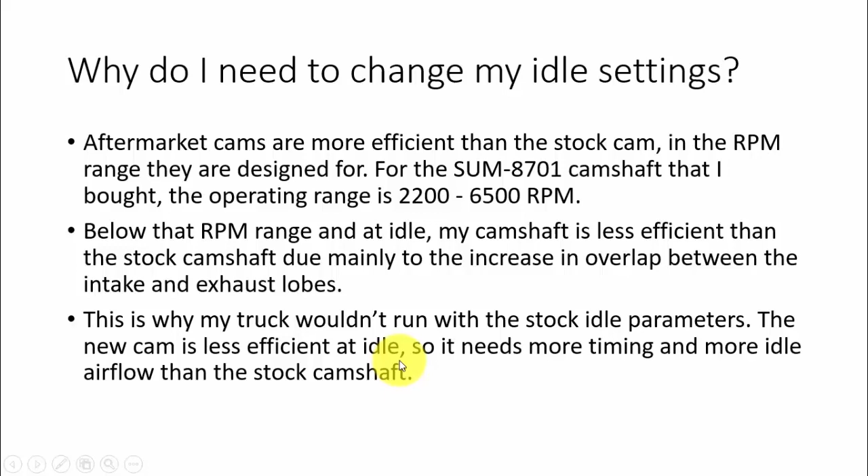So that's why my truck wouldn't run with those stock idle parameters. The new cam's less efficient at idle, so it needs more timing and more idle airflow than the stock camshaft. So the first thing I changed was increase that base idle RPM set point. This is basically the target the ECM wants the engine to idle at. Because of the increased overlap, they don't idle as stable as a stock cam, so you need to increase the idle speed.

And I define a stable idle as being able to stick within that target set point plus or minus 50 RPM. So the first thing I did in that last video was go into this table and add 225 RPM to every cell. I wanted the slowest idle speed the ECM would ever command to be 750, and that's normally when the truck is operating. The engine coolant temp is probably in this row here anyways. So I wanted the lowest speed the ECM would tell the truck to idle at to be 750.

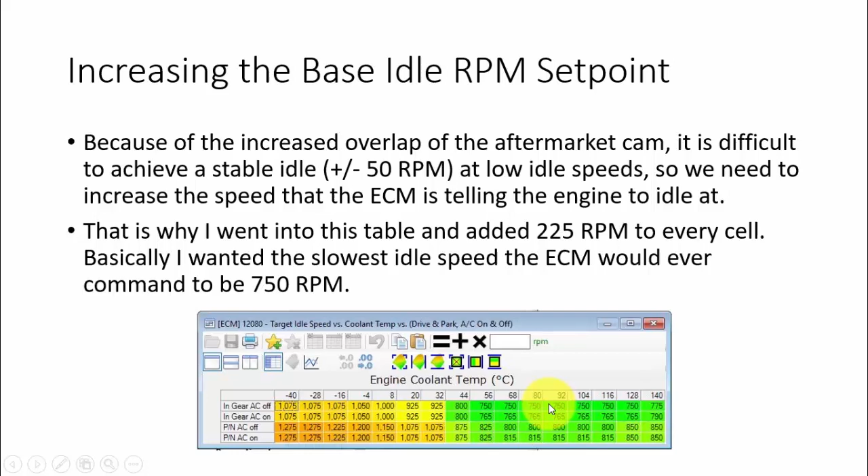So next slide, I'll tell you how I got that 750 number. It is basically from this table here, which I believe came from somewhere on the HP Tuners forum. So I looked at my cam card.

It has an overlap of -1 degrees. And so looking at this table here, it's less than 0. So that's why I went for a target idle RPM. It says 750 to 850, but I went on the lower end of that. Basically, the ideal idle speed for any cam, you want it to be the lowest RPM that it will be stable at, like stay within that plus or minus 50 RPM, like lower is better.

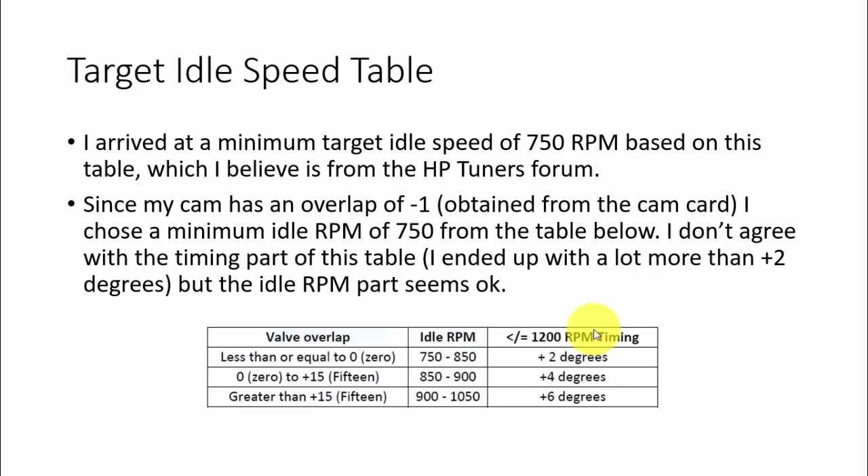I don't totally agree with this timing part of the table. I ended up with a lot more than an extra 2 degrees of timing, but as you'll see later in the presentation, I think I might have actually screwed up and went a little too high on my base idle spark advance tables, but we'll tweak that when we hop on and do some live tuning on the truck at the end of this presentation here.

So I also wanted to talk a little bit about how this ECM controls the idle, and it's different on newer Chevys. Newer Chevys with the electronic throttle actually use that electronic throttle as your idle air control motor. But since this is an older P01, or some people call it the 0411 computer, basically it's got 2 ways of maintaining that target speed that we entered into that last table. The fastest way of controlling that idle speed is by adjusting the ignition timing, and it does that based on the overspeed and underspeed tables, which we'll look at a little later in this presentation.

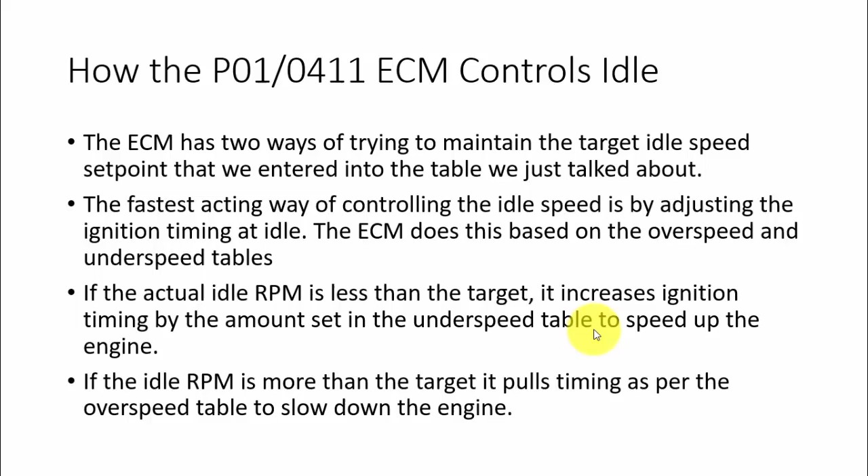So if your actual idle RPM is less than the target, like let's say from that table, the ECM wants the engine to idle at 750 RPM. If your actual idle is 700, it's going to increase that ignition timing to speed up the engine. And if your idle RPM is more than the target, like let's say it's 800, it'll pull timing out to slow down the engine. So ignition timing reacts fast, and it's a fast way of controlling the idle basically.

But there's another way that the ECM tweaks the idle speed, and that is with the idle air controller, and that's a slower reacting way of controlling the idle speed. It opens and closes the idle air controller, and like I said, on newer vehicles it just opens and closes the electronic throttle, and that's basically like stepping on the gas a little bit with your foot. It just lets a little more air into the throttle body.

And so to decide how far it opens that idle air controller motor, the ECM looks at this base running airflow table, and there's another table it uses in there that converts this grams per second or desired airflow into idle air controller steps, but I think you only need to change that if you're going with like an aftermarket throttle body. So since I've got the stock throttle body that came with my 5.3, I left that idle air controller steps table alone.

But that's why at the start of that last video I had to go in and adjust this table. I adjusted most of the cells to 14, and that's basically like telling that idle air controller stepper to open the gas a little more. It's like putting your foot on the gas pedal a bit to keep the truck idling better.

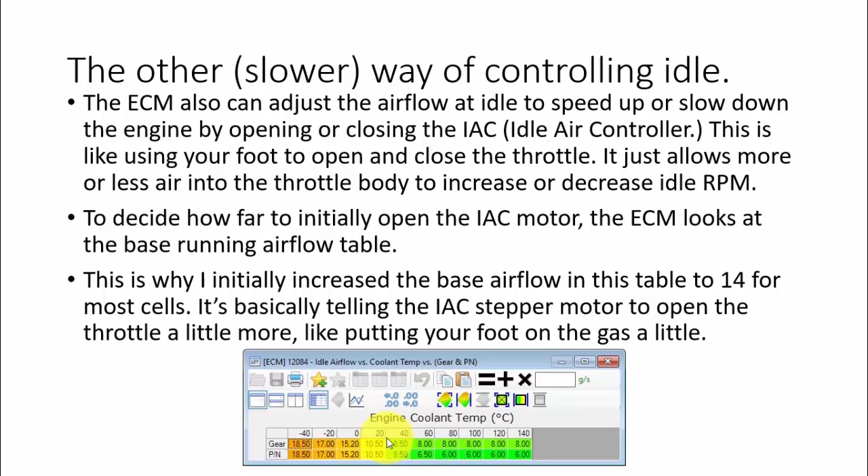So then I went on to try and find the ideal idle timing, and this is where I think I might have screwed up a bit. So I locked in that idle air controller at a fixed, I think it was 65 steps or something like that, using the VCM controls, and that basically fixes the throttle position at one position. Otherwise, I wouldn't be able to see the RPM change, because if I bumped up the timing 5 degrees, it would want to idle faster, but the ECM would be stepping back on that idle air controller to try and maintain that set point. So in order to find out what timing the engine likes to idle at, I locked out that idle air controller at a set position.

So then I went in and adjusted the timing using those VCM controls to find the idle advance setting, or the degrees of timing that give me the highest idle RPM and the highest manifold vacuum, which is the lowest manifold absolute pressure reading. So that basically is finding what degrees of advance of timing that cam is most efficient at.

But I think now, looking back and thinking about it, I might have done this wrong, because if I've set my base timing at the max RPM that cam will run at, then the ECM can't do its correction through the overspeed and underspeed idle tables, because if it's calling for more speed, it'll add more timing, but the cam's basically maxed out already.

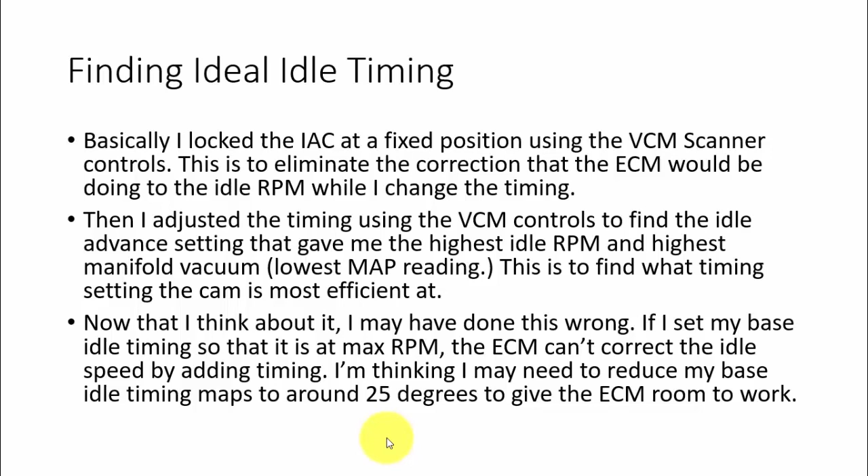So then, once I had found the ideal idle spark advance, I basically went into the spark advance tables for drive and park, and those are the tables that the computer looks at when you're idling and decides what to put in for timing. And there are a couple other tables with engine coolant temperature and intake air temperature that put a multiplier in there. So if your coolant is getting hot, or if the air coming into the engine is getting hot, it will pull timing. So that can change your idle spark advance as well.

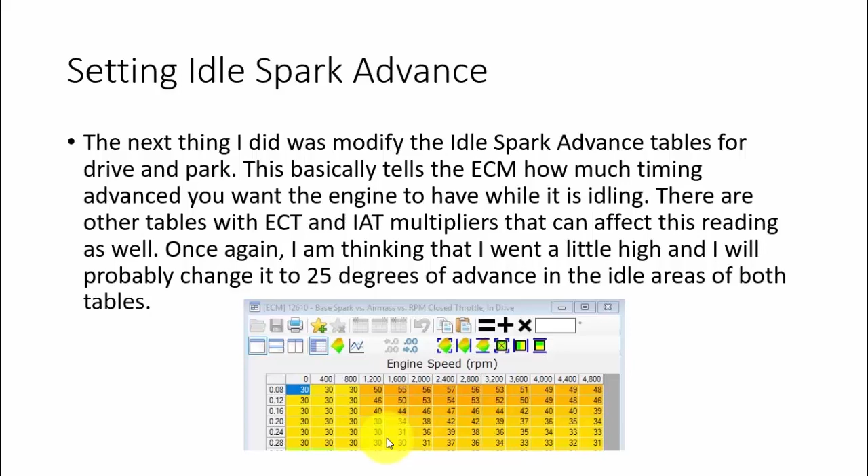And again, I'm thinking I went a little high initially. You can see I was at 30 degrees in the idle timing area, so I'll probably go back and change that to 25 degrees on both the in park and in gear tables.

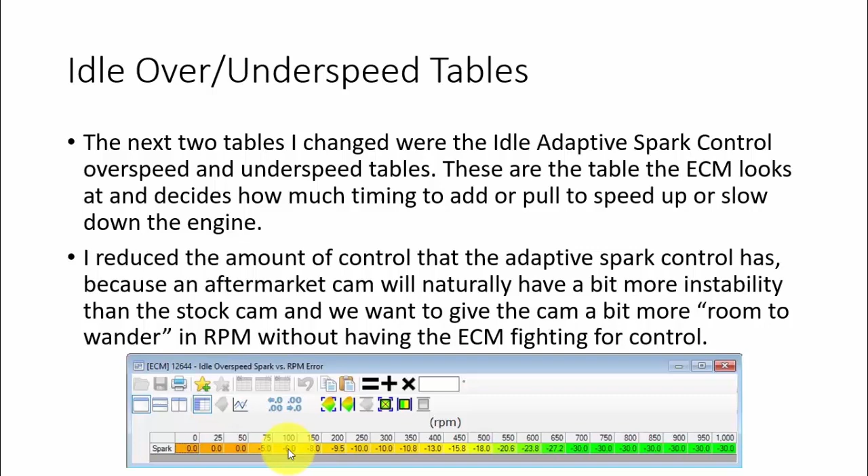So basically I reduced the amount of control by moving all the numbers over a couple cells, and that's because, as you guys know, when you put in a rowdy camshaft, it isn't as stable at idle. So we basically want to give the cam a bit of room to wander without having the ECM trying to fight the natural up and down changes of the cam. So that's why we went in and modified those tables.

And then the last thing I did in that video was go back into that base running airflow, I think it's called the idle airflow table. Initially I just plugged in 14 grams per second, and that got the truck running without me having to pedal the gas. But then we went back in and did some final tweaks to that table. Again, that's the table that the computer looks at and decides basically how far to open the throttle, which in this case is the idle air controller, to keep the idle RPM at its target.

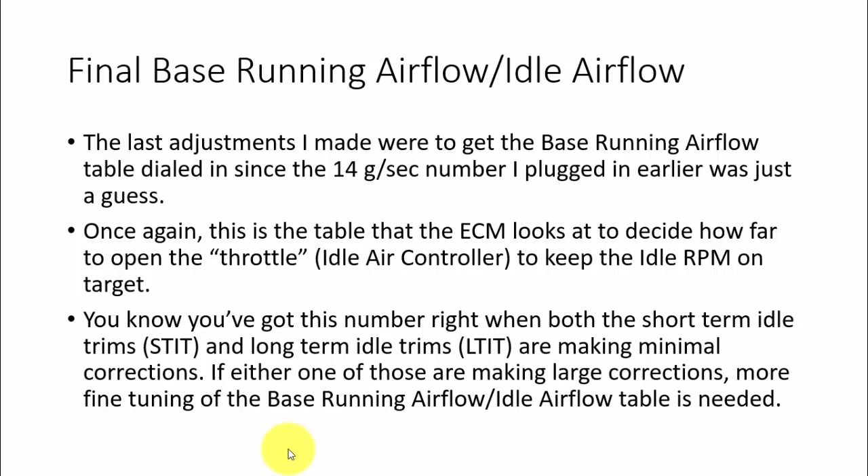And how you know you've got that number right is when the short-term idle trim and long-term idle trim are making minimal corrections. If either one of those are making big corrections, you've got to go back and do a bit more fine-tuning of your airflow table there.

So okay guys, I hope that shed a little bit of light or gave you a bit more information as to why I made the changes I made. Now I'm gonna fire up the laptop again and hop in the truck, and I'm gonna change those base, I can't remember exactly what it's called without having my computer in front of me, but basically your base idle spark tables, I'm going to change them from 30 to 25.

And then I'll show you guys one other issue. I was still having issues with the truck idling in drive, and you could see it at the end of the last video, the timing bouncing all over the place. So I'll show you guys how I diagnosed that and got rid of that. So by the end of the video here, we'll have the truck idling basically perfectly, hopefully. So we'll fire up the computer view now and hop in the truck and do some final tweaks.

Okay guys, I got my scanner open here. Truck is running, as you guys can hear. I still haven't figured out how to get good audio when I'm recording and the truck is running, so it sounds kind of crappy.

I went in and changed those base spark advance tables at idle in both park and in gear tables to 25. And you can see, other than the occasional little correction, it's at 25. But I just wanted to demonstrate the truck idles fine. It's in park right now, and you can see it's hanging in there. The computer's calling for 800 RPM, and it's pretty much staying within that plus or minus 50 tolerance that I'd like to see. Goes out of it every once in a while, but I can live with that.

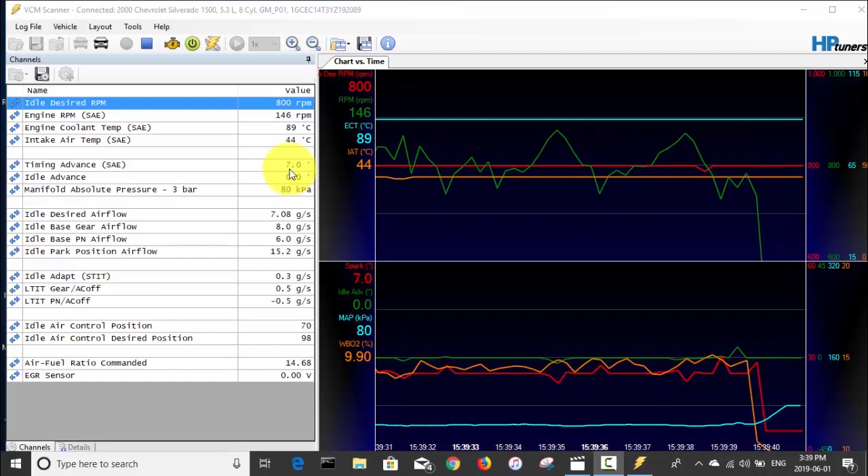So I'll just shut off the truck for a sec. We'll stop scanning. I made another channel configuration here, this timing advance. So basically I logged every parameter that could either add timing or take away timing from the main spark table. I'll fire up the truck again. We'll start recording, and then it'll be pretty clear which one of these is pulling all that timing, and then we can go into the editor and fix what's causing that issue. So I'll fire up the truck now and we'll demonstrate that.

We'll start scanning again. So again, I'm in park. You can see down here, our short-term idle trims are good, long-term idle trims are good. And the longer it runs, the better these will get, but that's basically perfect. Idle timing is where we want it to be at the table. Short-term and long-term idle trims are telling us our base airflow table is correct. So idle in park is perfect.

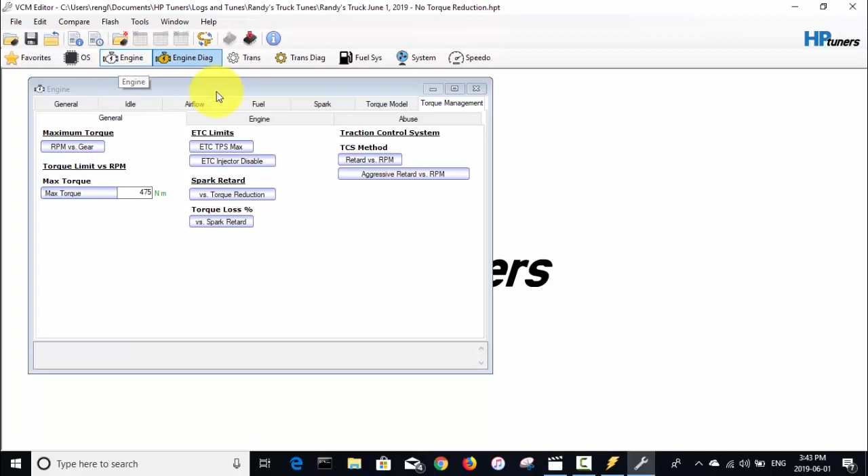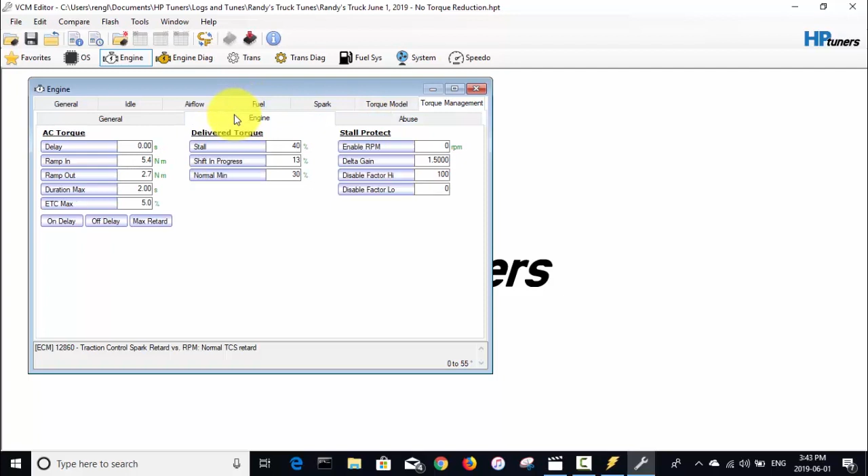We want it to pull a bit of timing, but it's that torque management that is what's causing my terrible idle in drive. So we're going to go into torque management, this retard versus RPM table. And so this is, no, I don't think that is what I want. Where is it? No, it's right here. This spark retard versus torque reduction.

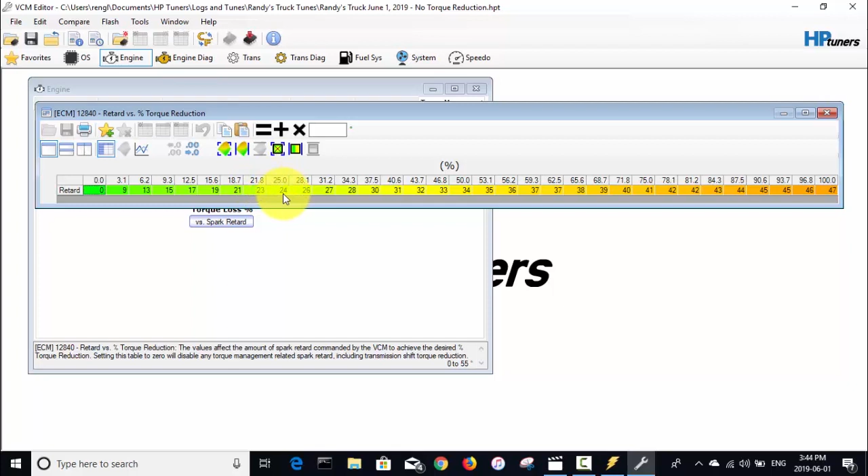Pretty much looks the same, but basically when the computer is wanting to reduce the engine torque by 25%, it pulls like 24 degrees of timing. So I think that's what's happening. So I'm basically going to zero out this whole table. I've selected it all, put a 0 in that box, make it equal 0.

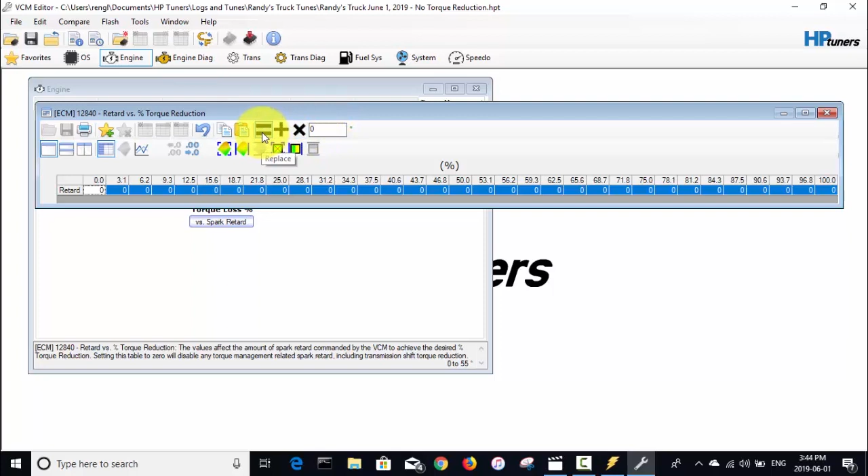And yeah, you'll notice in that last video there's one time where I entered 30 degrees in the box or whatever, but forgot to go over and click that equal sign, so the table didn't actually change. But now this table's actually changed. We'll write it to the truck.

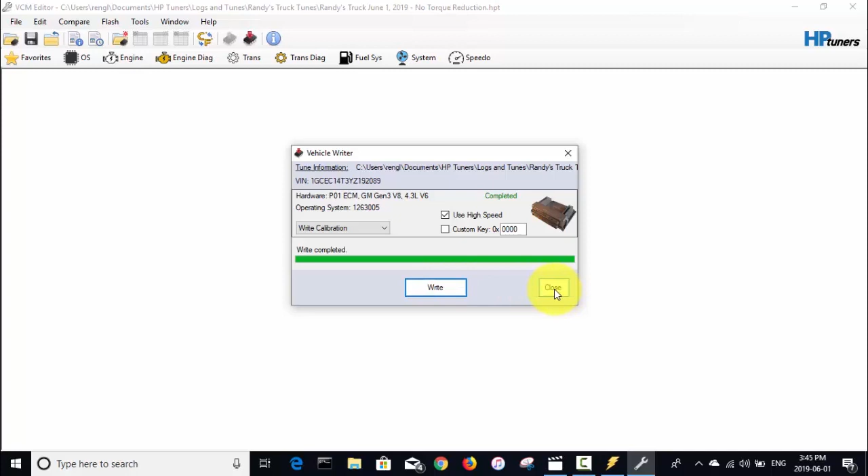And I did notice on initial startup, it takes 5 or 10 seconds for the truck to kind of find its happy spot. So there might be a little more tweaking that can be done there. There's like a throttle cracker and startup airflow and throttle follower and a few other parameters that I haven't messed with yet. But once the truck's been running for 10 or 15 seconds, it goes to normal. So we've wrote that to the truck.

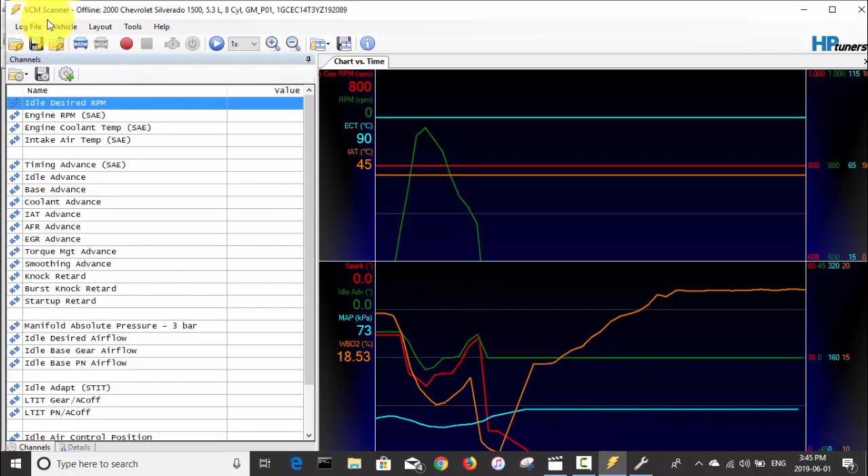Now we'll go back to the scanner. Just got a text there that distracted me for a second, so we'll connect. I'll start the truck again. And yeah, you can hear there, it just kind of stumbles for 10 seconds or so. But now it's pretty well back to normal. So now we'll go in and try put it in drive again.

So that's in park, that's in reverse, still does fine. Back to neutral, it's doing fine. Now we'll try it in park or in drive. Keep getting my gears, and it's sounding way better. It's right at 25 degrees. Every once in a while it pulls a tiny bit of timing, but it sounds 100% better.

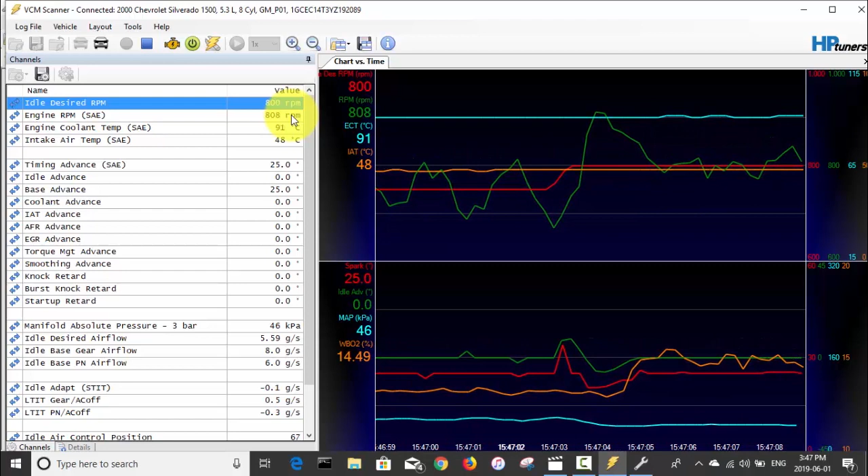It looks like based on these short-term idle trims and our idle desired airflow, we could go back to that base desired airflow table and increase it to about 10. So I'll continue to tweak that as time goes on. But it's sitting here in drive idling, it's maintaining that plus or minus 50 RPM pretty much, so pretty happy with it. So flip the camera around or go back to the camera mode here and talk to you guys for a second.

Alright, so I think that was the last piece of the puzzle. That torque management table was messing up my idle in drive there. So we've got that working the way it should. I probably don't even have to, but I probably will make a few final tweaks to that base airflow in gear table, because it seemed to be wanting slightly more airflow. But I'm pretty happy with it.

It's definitely drivable. I can take it to the track, take it to local cruise nights or whatever, and I know it's not going to stall when I come up to a stop sign or a stop light, and it's working pretty well. So we're going to wrap it up for this one.